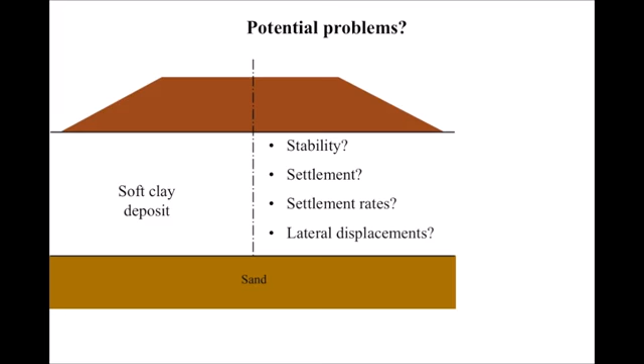As the introduction, the problems associated with embankments on soft clays are essentially stability, settlement rates, lateral displacements. For this presentation, we talk only on settlements and settlement rates, in other words, we'll talk about compressibility and consolidation.

Usually, the compressibility of clays is represented in a e-log sigma prime V diagram and characterized by the pre-consolidation pressure, which is defined by sigma prime p or sigma prime Vy, and essentially the compression index C sub C.

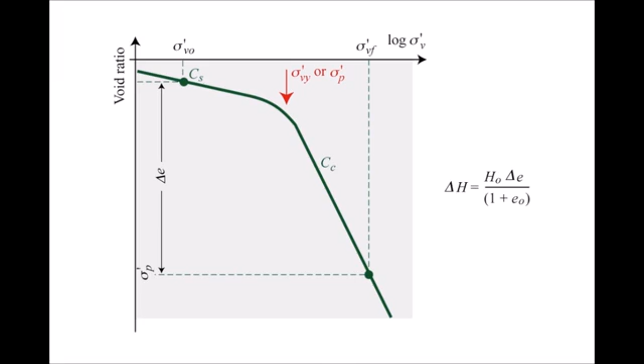With time, when we load a soil, there is some settlement, some decrease in void ratio associated first to pore pressure dissipation, and that's primary consolidation, but then settlement continues during secondary consolidation. This secondary consolidation is characterized by C alpha e, which is the slope of the curves in an e-log T diagram. The general equation for one-dimensional consolidation shows that the strain rate is directly related to the pore pressure, which means that if we have movements, settlements during secondary consolidation, there are still excess pore pressures. They are small, but still there.

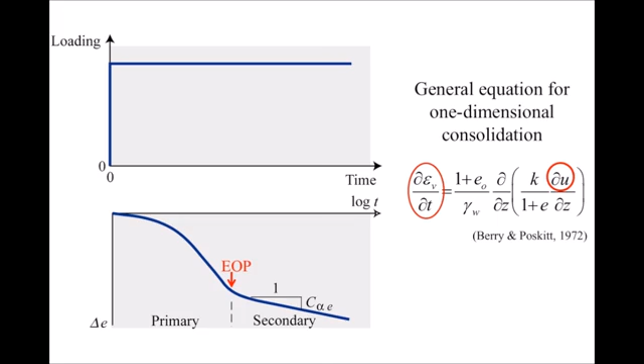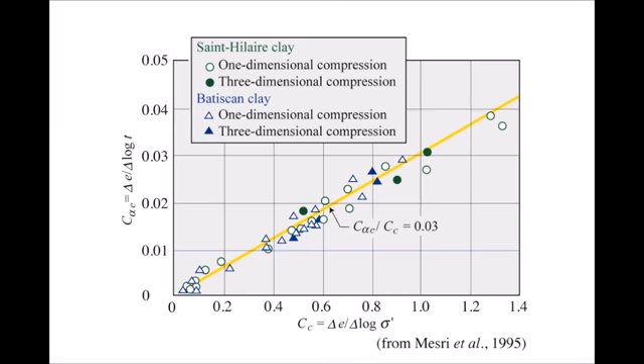In laboratory conditions, Mesri and co-workers have demonstrated that C alpha e is proportional to C sub C for a given clay. Here, the ratio is 0.03 for these two clays. They also have shown that for inorganic clays in general, this ratio is always equal to 0.04 plus or minus 0.01. For granular soils, it's smaller, but for organic soils, it is larger. So this is an interesting characteristic.

Now a few words about the CRS, constant rate of strain oedometer test, because I will refer to this test and maybe some people are not familiar with it. We have a specimen in an oedometer cell which is loaded on a press, a triaxial press, at a constant rate of strain. The objective of this test is to get a compression curve within about 2 days. The advantage of this test is that the stress-strain curve is continuous, so the pre-consolidation pressure is well defined.

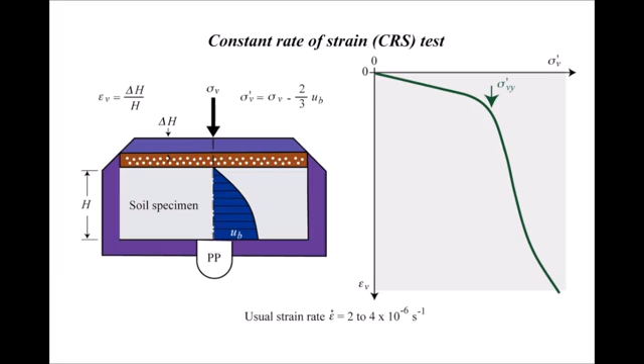In this test, we measure the pore pressure at the base of the specimen, UB, and the vertical effective stress is equal to sigma V minus 2/3 of UB. There are limitations when the pore pressure at the base is too high. What has been shown by several authors is that when we increase the rate of strain, the compression curve moves towards larger effective stresses as indicated on this figure. Here is about 10 to the minus 8 per second, and here it's 10 to the minus 5 per second.

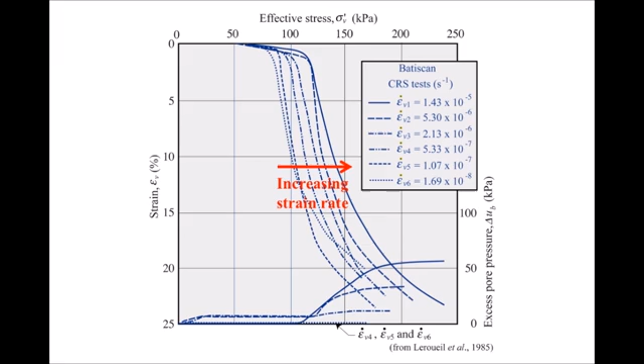From this set of curves, which we call isotaches, relevant for stage loading tests as in a conventional oedometer test, it can be shown that this set of curves can be described by two curves: one showing the log of the pre-consolidation pressure or vertical yield stress versus strain rate, and a normalized effective stress-strain curve in which the vertical effective stress is normalized with respect to the pre-consolidation pressure associated to the strain rate.

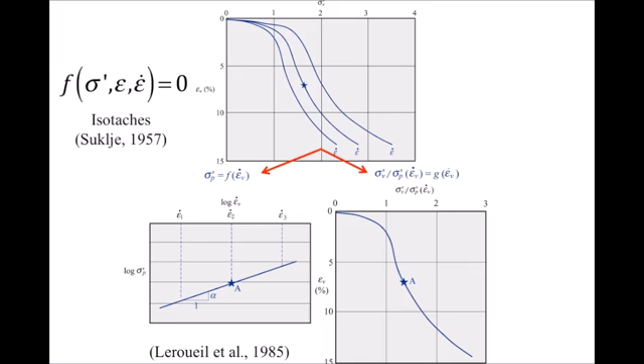The slope in the log-log diagram can be defined by alpha. We can show that alpha is equal to C alpha E over CC. So for inorganic clays, for example, C alpha over CC, or alpha, is equal to 0.04 typically. This means that the change in effective stress when we change the strain rate by one order of magnitude is typically 10%.

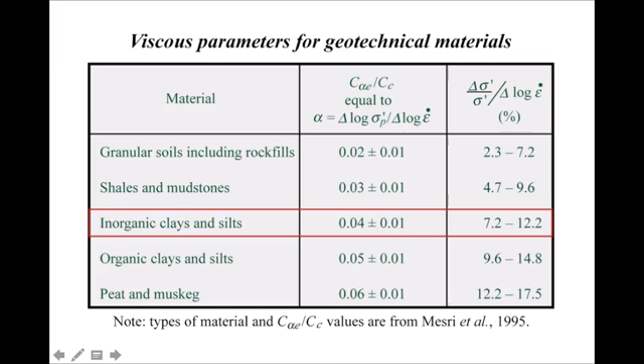Remember this number. It's smaller for granular soils and larger for organic soils.

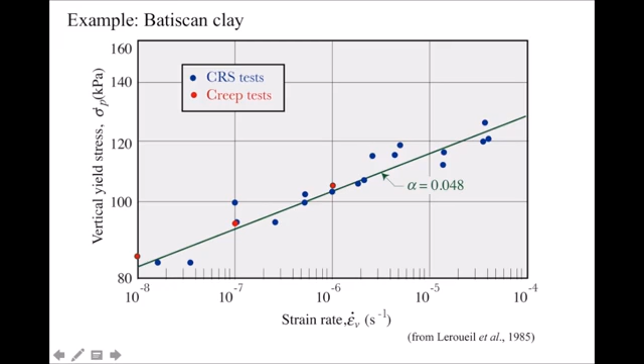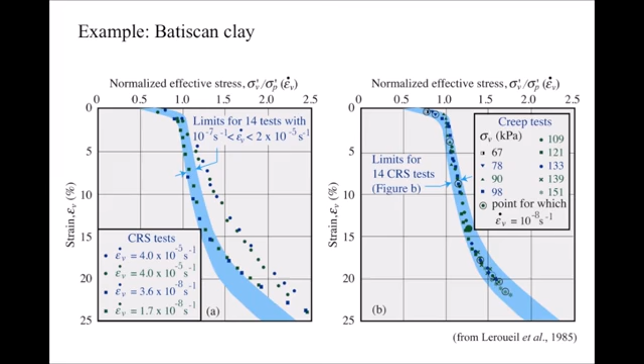This is an example on Batiscan clay, showing the vertical yield stress or pre-consolidation pressure versus strain rate in log scale, and alpha is equal to 0.048 in this case. These are, for the same clay, normalized compression curves, and you can see that all the data, except these two data points which were obtained at too large strain rates and gave too large pore pressures, are in a small range considering that we are working with a natural clay.

This is another example, Berthierville clay, and the curve in the middle here is the relationship between the vertical yield stress and the strain rate at 20 degrees, and here you have the normalized stress-strain curve.

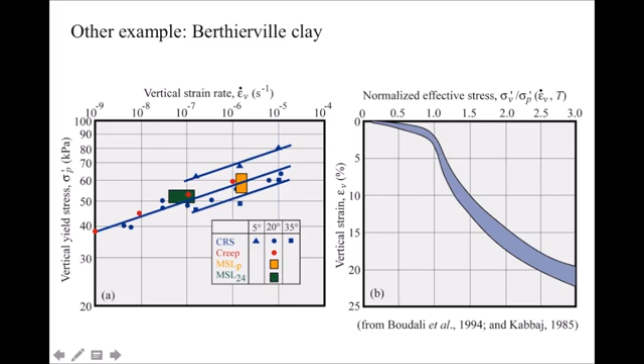Watabe et al. have shown that the relationship is not perfectly linear in log-log, but is curved as shown here. In particular, there would be an asymptote at a pre-consolidation pressure equal to 70% of the pre-consolidation pressure at a strain rate of 10 to the minus 7 per second. 10 to the minus 7 is typically the strain rate obtained after 24 hours.

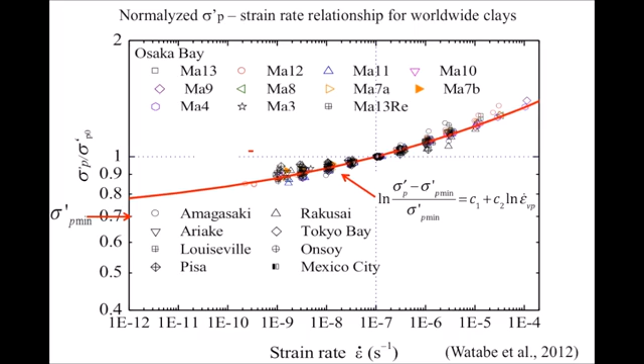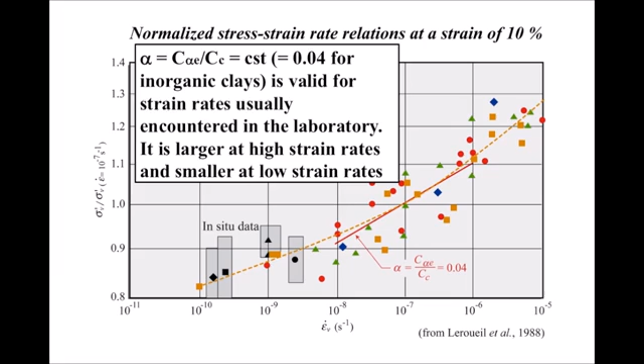So it will be a curve and not linear. We observed this earlier, and you can see on this data that alpha is equal to 0.04 between typically 10 to the minus 8 and 10 to the minus 6, which are strain rates usually obtained in laboratory tests. But at larger strain rates, the slope is larger, and it is smaller at small strain rates. This is consistent with what is shown here.

These test results were obtained by loading specimens in the normally consolidated range and then unloading just a bit to a given OCR. When the OCR is relatively small, such as 1.5 here, after unloading the soil swells a bit and then starts settling again in secondary consolidation. However, when the OCR is high, for example 8 here, there is swelling due to pore pressure dissipation, and then the soil continues to swell in a kind of secondary swelling.

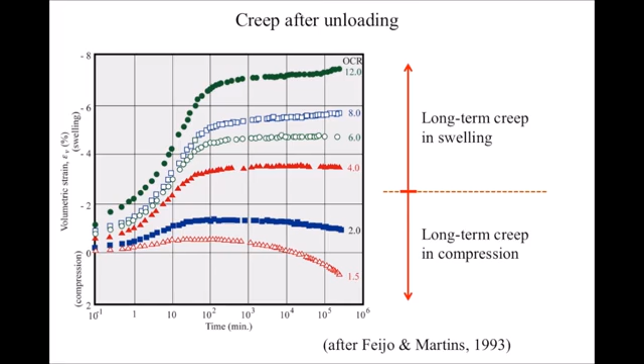So the strain rate model I was talking about before can be generalized in this form, where we have secondary consolidation, but below an indifferent equilibrium somewhere here, we have secondary swelling. So it's a kind of generalization of the stress-strain rate model.

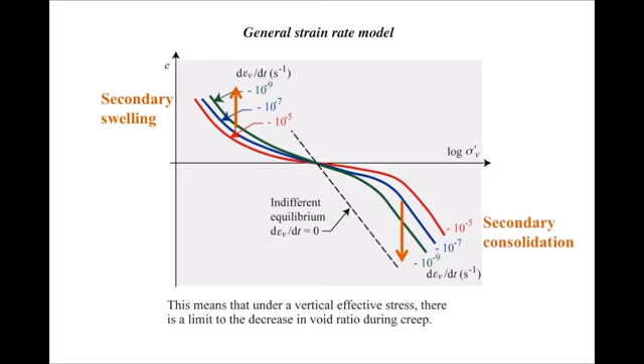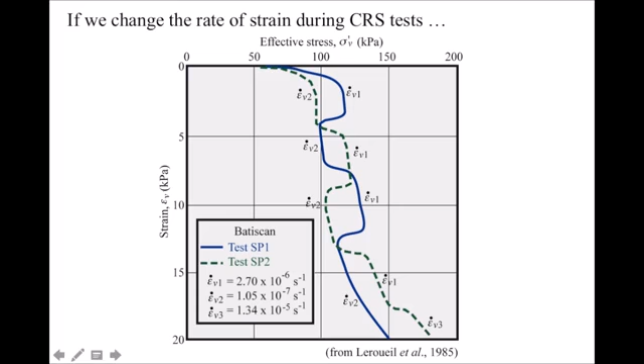Now, if we come back to the CRS test, I told you that typically it's completed in about 2 days, and the strain rates usually used are between 3 and 5 times 10 to the minus 6 per second. I told you also that after 24 hours, the strain rate is typically 10 to the minus 7 or slightly less, which explains that the compression curves obtained in CRS tests and in conventional 24-hour tests are different, with the CRS test giving a compression curve at higher effective stresses than the 24-hour test due to strain rate.

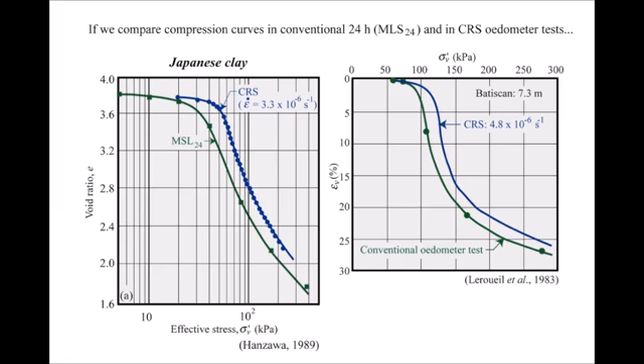This has been observed on many clays, here Japanese and Quebec clays, and it can be shown that the strain rate is in this order, slightly less than 10 to the minus 7, as I was saying before.

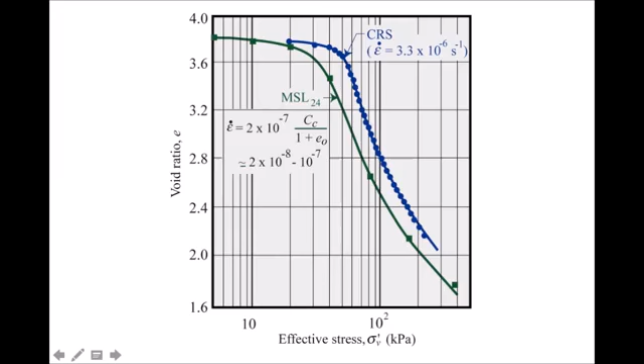Because of this, it appears that the pre-consolidation pressure obtained in CRS tests is typically 25% larger than that obtained in conventional 24-hour tests, which means that if you change your test to a CRS, be aware that your calculated settlements will be much smaller than with the 24-hour oedometer test. This has been observed in Quebec, Japan, Finland, Italy, UK, Sweden, Hong Kong, and Singapore, so it's quite general.

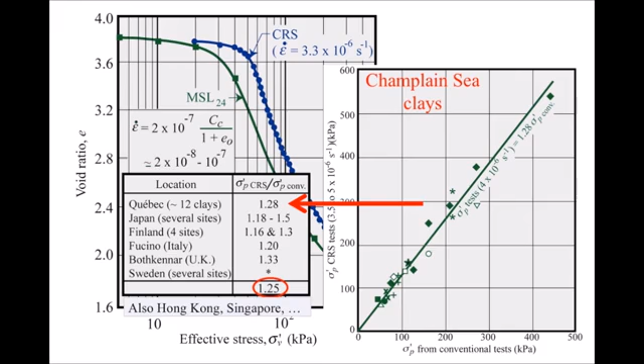Another aspect relates to what happens within a specimen. Mesri and co-workers made special tests with specimens, with four subspecimens in series, subspecimen 4 being close to the impervious boundary and specimen 1 being close to the drainage boundary. They loaded such specimens.

They loaded it to the same stress increase, and the results here are typical of what they observed. Specimen 1 goes to relatively high stresses, while specimen 4 goes to much smaller stresses, and subspecimens 2 and 3 are somewhere in between.

This can be explained as follows. Close to the drainage boundary, the strain rate is initially high, so the soil goes to the high strain rate curve, while far from the drainage boundary, the strain rate initially is relatively much smaller, so the effective stress goes to lower effective stresses. When consolidation progresses, the strain rates become more homogeneous within the specimen, and all the curves converge. So the subspecimens in one specimen do not follow the same stress-strain curve because of strain rate.

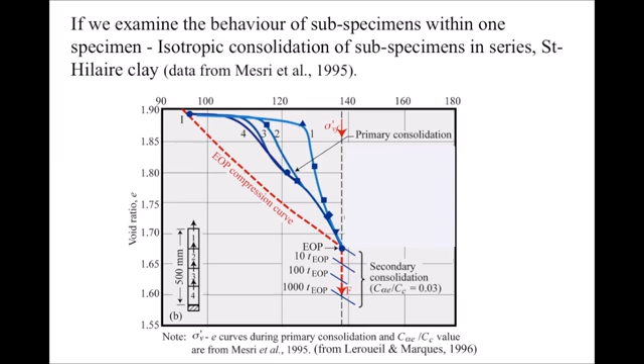From these results, it's possible to define a set of isotache, constant rate of strain curves, and subspecimen 1 goes to a high strain rate, 10 to the minus 5, while subspecimen 4 goes to the curve at about 10 to the minus 6. So this is consistent with the strain rate model.

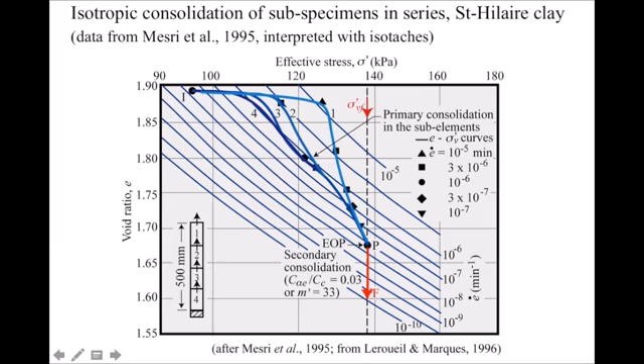Another aspect which has been discussed a lot is what happens if we have clay layers of different thicknesses. This problem has been raised by Ladd et al. in 1977, and there are two extreme hypotheses.

Hypothesis A considers that there is no viscosity during primary consolidation, and that whatever the thickness of the soil layer and whatever the strain rates, the stress-strain curve followed is the same during primary consolidation.

On the other hand, there is hypothesis B, which considers that there is viscosity during primary consolidation as during secondary consolidation, and that consequently the compression curve followed in a thick specimen will be below the one obtained on a small specimen. So here would be the small specimen thickness, and here the thick specimen thickness.

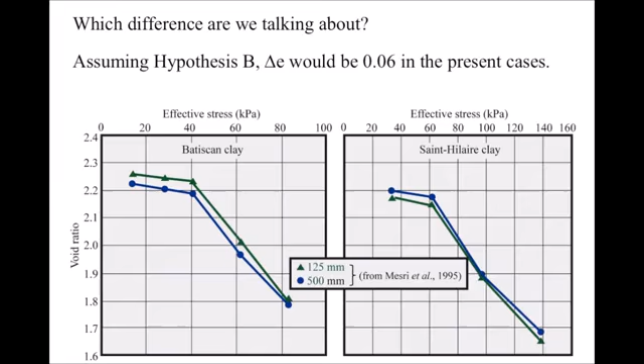But there is something more important: how the end of primary consolidation is defined. Degago et al. in 2009 examined this data and considered that we could define the end of primary consolidation at a given degree of consolidation.

So, for example, 96% in figure A and 93% in figure B. They looked at the results at the same degree of consolidation, and came with the red curves for the 125 millimeters rather than the green here—the red curve here rather than the green.

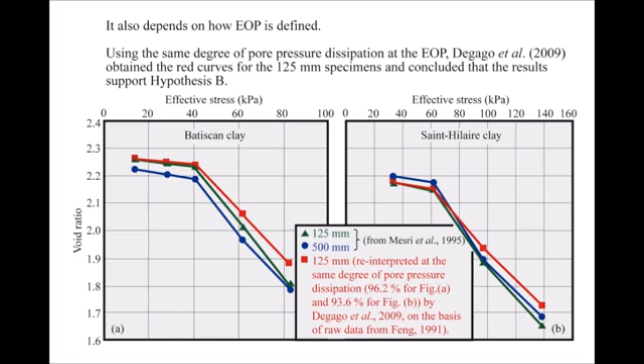At that time, they found that there is a difference between the two specimens, and that this difference is not far from 0.06. They concluded that hypothesis B is the correct one, consistent with the strain rate model previously described. So clay behavior is controlled by an effective stress, strain, strain rate relationship, and this model can be extended, but also can present limitations.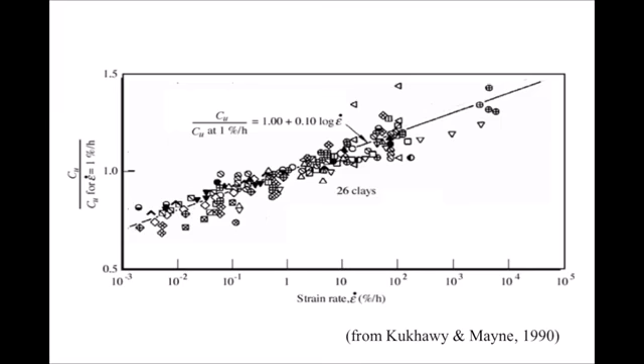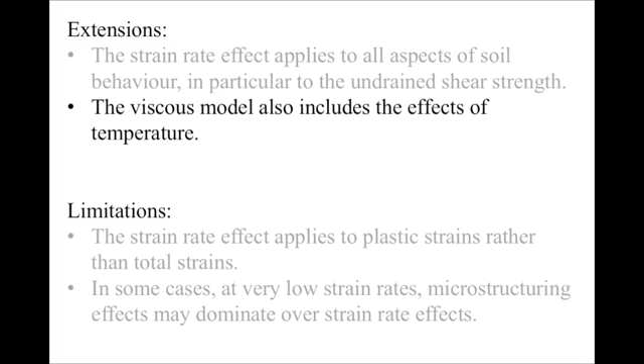Another extension is that the viscous model, the strain rate model, can also include the effects of temperature. This has been shown by several people, in particular by Eriksson, who performed CRS tests on Swedish clay at different temperatures. The results are shown here: the smaller the temperature, the larger the vertical effective stress. The pre-consolidation pressure, or vertical yield stress, is plotted as a function of temperature, and there is a decrease with increasing temperature.

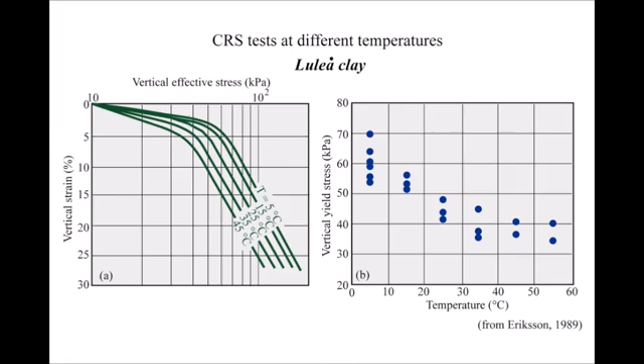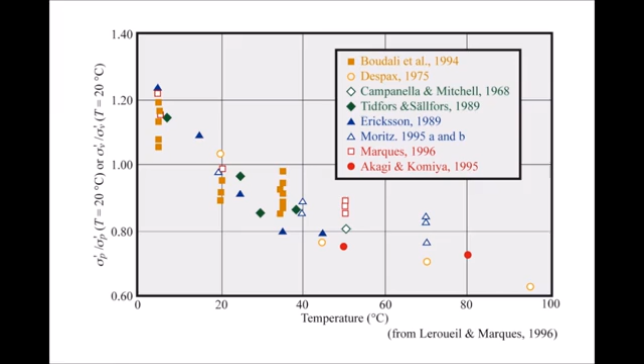It has been shown that the relationship obtained on Luleå clay is about the same as the one obtained on a variety of clays, as you can see here. So the pre-consolidation pressure, or vertical yield stress, which was a function of strain rate, is also a function of temperature. This is shown here for the Berthierville clay, with the line in the middle at 20 degrees, the upper one at 5 degrees, and the lower one at 35 degrees.

But when the vertical effective stress is normalized with respect to the pre-consolidation pressure associated with the temperature and strain rate, all the data come into a very narrow band. So it can be said that the strain rate model can be extended to temperature, and we have similar numbers for different clays in terms of effects of temperature and strain rate. The alpha is 0.04 for inorganic clays, and there is no doubt that there is something fundamental behind this.

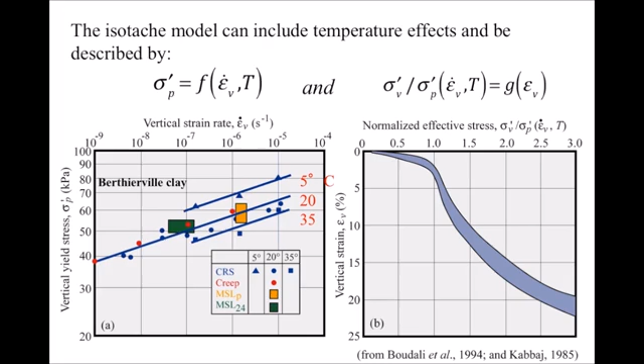Limitations now: the strain rate effects apply to plastic strains rather than total strains. Consequences are relatively small in most cases, but fundamentally it's important to indicate that point. When we have a clay during secondary consolidation, with a decreasing void ratio, if we stop the strain, the strain rate is zero, so it's constant, and the effective stress should be constant. It's not the case.

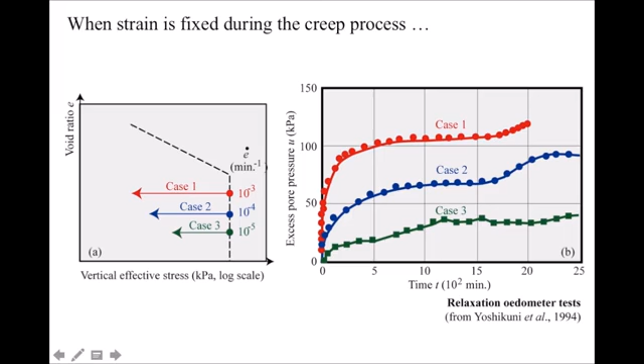During this test, with time, the pore pressure increases, and so the effective stress is decreasing. The explanation is given here: if we have soil at a point such as A, the plastic strain has a tendency to creep, to increase and go here.

But as the strain or void ratio is constant, the soil has to compensate with an equal value of elastic strain, shown here, and to have this, we have to decrease the effective stress. So in what we call a relaxation test, the soil has to increase its pore pressure. So it's not a limitation, but a specification of the soil behavior.

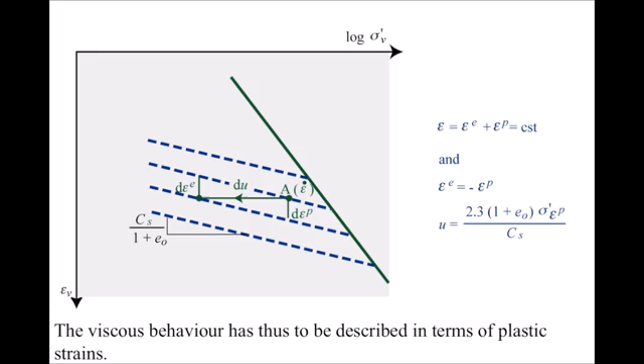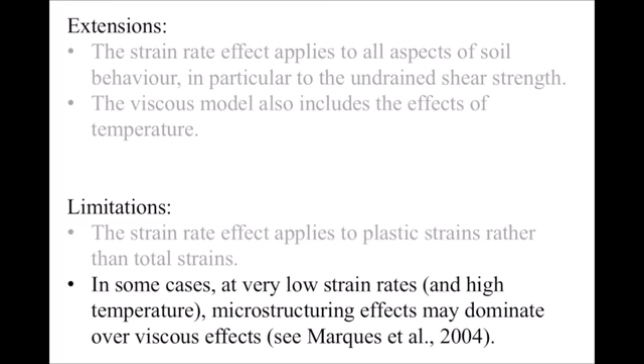Finally, in some cases, at very low strain rates or high temperatures, microstructuring, or bonding of the soil, may dominate over viscous effects, and that could be a limitation. So, in conclusion, from laboratory observations, clay behavior is controlled by strain rate and temperature. Now, what happens in situ?

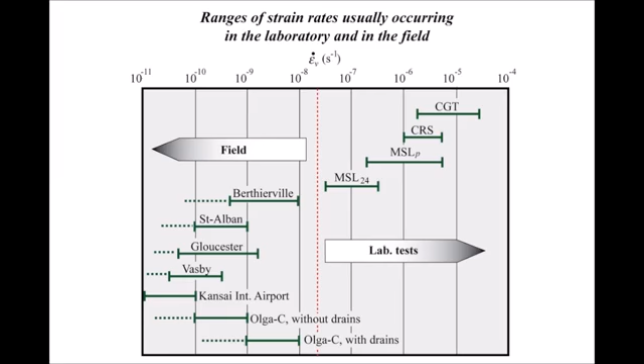Consequently, in our strain rate model, the compression curve followed in situ should be below the compression curve followed in the lab. Smaller strain rate, smaller effective stress. So that's what we have examined.

I remember this figure. Hypothesis A indicates that the compression curve in situ and in the lab would be the same, while hypothesis B indicates that the laboratory curve would be here, while the in situ curve would be below, as shown here. Also, the strain in situ would be smaller with hypothesis A than with hypothesis B.

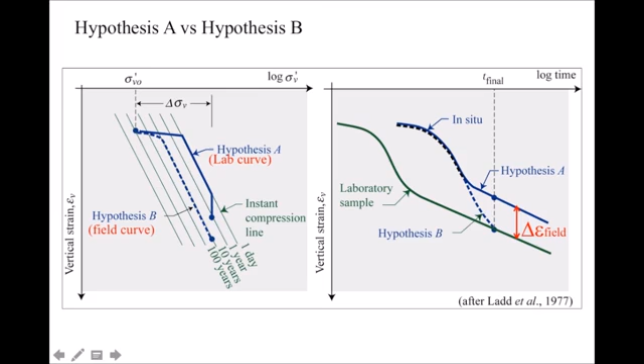So we have examined this aspect by examining the effective stress strain curves in situ, under embankment. If we have deep settlement gauges, we can define the evolution of strain and strain rate with time. But also if we have the pore pressure, we can define the vertical effective stress and then get the field compression curve, which is the truth. Nature is saying that's the compression curve.

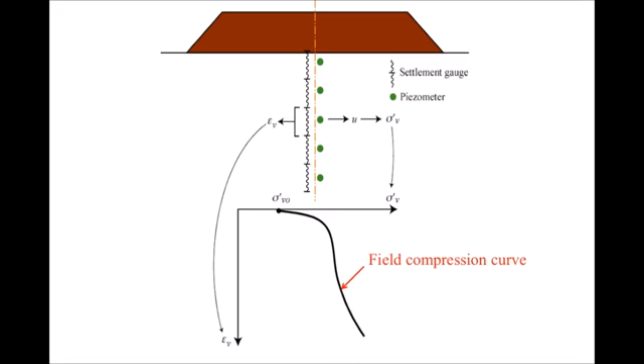This has been done and compared under four test embankments: Berthierville, Gloucester, Saint-Alban, and Vasby in Sweden. In green we have the compression curve obtained at the end of primary consolidation on high-quality samples, and in red, the in situ curve. We can see that in all cases, the in situ compression curve is below the compression curve obtained at the end of primary on high-quality samples in the lab, indicating that at least hypothesis A is wrong.

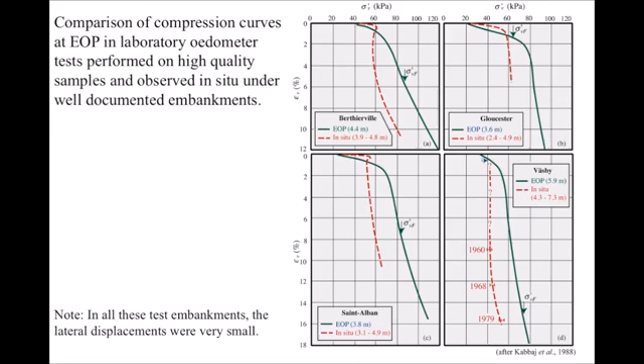Now, the effective stresses have been plotted in a normalized form here, and we have the rectangles here for in situ data, and the other points are laboratory data, which indicates that the in situ behavior is in continuity with, or consistent with, the laboratory data, indicating that hypothesis B is the correct one.

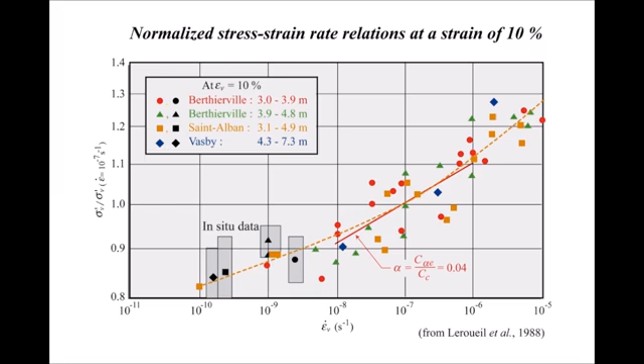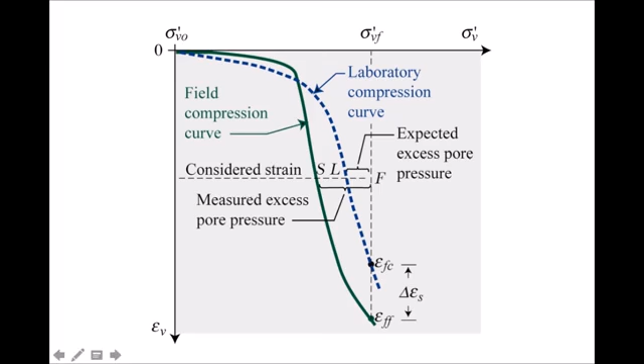Now, there are some cases where the data were not so well defined, but we can say that if we have the laboratory curve here in blue and the field curve in green, and if we estimate at a considered strain the pore pressure from the laboratory curve, the excess pore pressure at a given time is Lf. But in situ, it should be Fs, with Fs larger than Lf. That's in the logic of the strain rate model.

This can be shown with the case of the Changi Airport in Singapore. Here we have marine clays over about 40 meters, and it's a site which has been reclaimed - the airport is built over the sea on these clays.

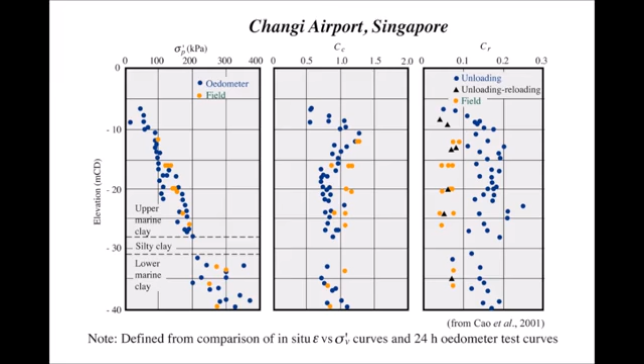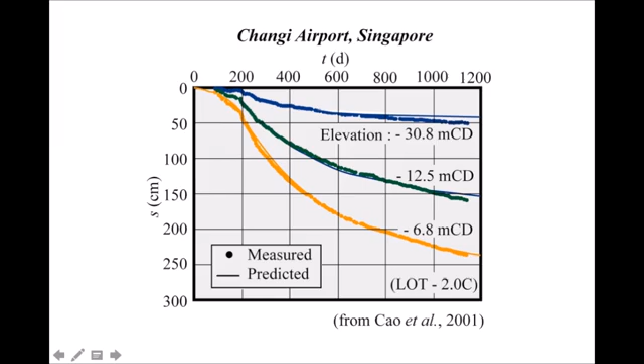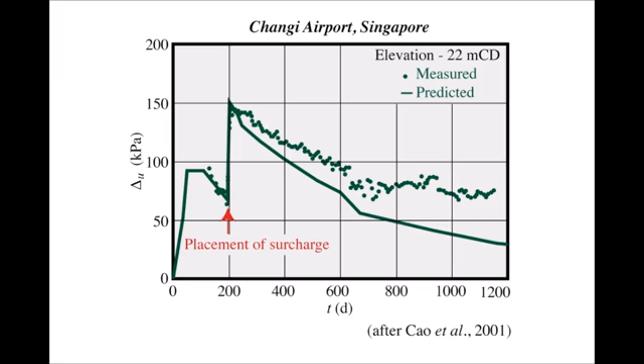By considering the 24-hour oedometer curves and by adjusting the permeability, they achieved excellent correlation between predicted settlements and measured settlements at different depths. But at the same time, they were not able to have such good agreement in terms of pore pressures, and in all cases, the measured pore pressure was larger than the predicted one - which is again in the logic of the strain rate model, with the in situ compression curve below the laboratory one. This has been observed in other cases in UK, in the States, in France, and in Sweden.

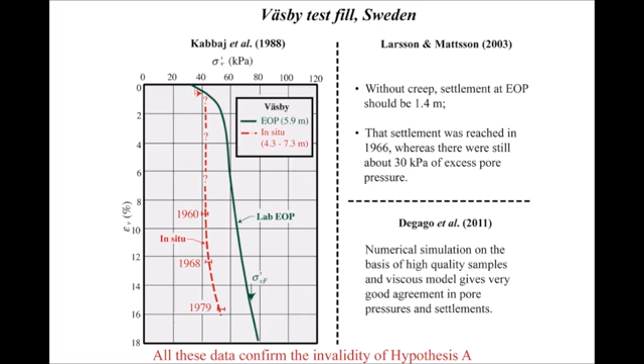More recently, a numerical simulation based on high-quality samples and a viscous model gives very good agreement in pore pressures and settlement, according to Degago et al. So all these data confirm the invalidity of hypothesis A and, in fact, the validity of hypothesis B.

However, Mesri and Choi in 1985 used the Väsby data to try to prove that hypothesis A was correct. For that, they used compression curves obtained on 50 millimeter specimens taken with a 50 millimeter Swedish standard piston sampler, taken in the 1960s. Here you have the field curve, and in orange the compression curve used by Mesri and Choi. Indeed, the two curves are not very different.

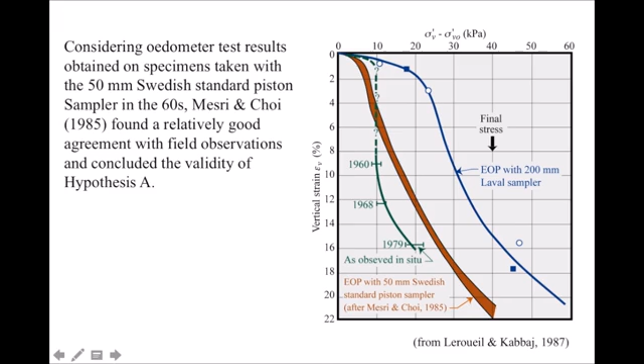Which explains why they came to the conclusion that hypothesis A was correct. However, you can see here that the curve obtained on the 200 millimeter diameter Laval sampler is very different, obtained at much higher stresses. And the explanation is given here.

Here we have a compression test shown with a dashed line at the end of primary, and the full line after 24 hours. Compression curves obtained with the 200 millimeter Laval sampler are in blue, and the 50 millimeter Swedish sampler in green. We can see that the Swedish sampler is disturbing the clay. The pre-consolidation pressure is significantly smaller and the curve is much more rounded. So it is believed that Mesri and Choi got a good agreement because the sampling disturbance was compensating for the viscous effects.

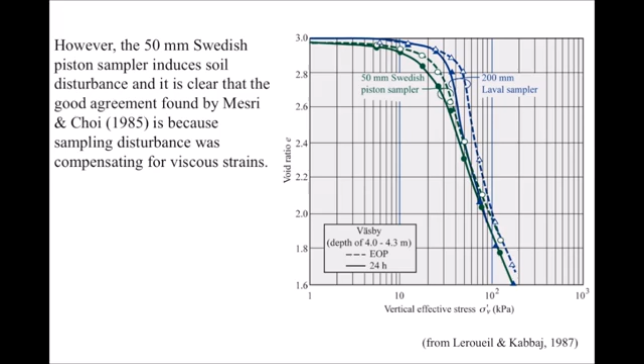Another case is the Kansai International Airport in Japan. It's an airport built offshore Osaka, about 4 kilometers from the shore. There was 18 meters of water, 18 meters of very soft alluvial clay, and several hundred meters of Pleistocene clays.

These Pleistocene clays are alternating with sand layers which are more or less draining. So that's the situation, which is quite complex due to these sand layers. For building the island, the alluvial clay was treated with vertical drains, and the settlement of the alluvial clays was completed in about 6 months.

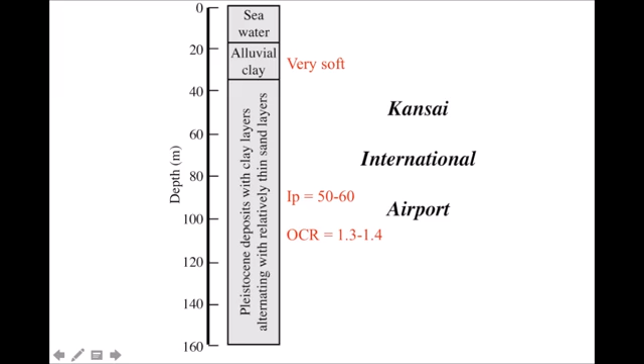So the long-term settlements are coming from the Pleistocene clays. Professor Akai calculated settlements on the basis of a 24-hour oedometer test, neglecting viscosity or rate effects. He came up with a final settlement of 5.9 meters.

And here you have the field observations. In 1994, when the airport was opened, the calculated settlement was equal to the measured one. So everything was apparently going well. But then you can see that the field settlements become much more important than the predicted one.

The 5.89 meters was reached in 1998, and in 2002 the settlement was 1 meter larger.

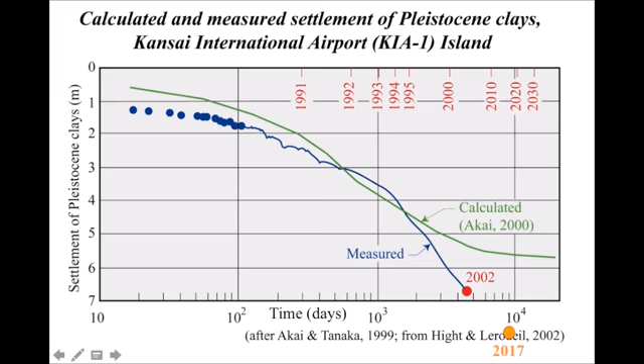And in fact, when we look at the pore pressures under the embankment, under the island, we can see that in this period the excess pore pressures are still larger than 200 kPa. That's a lot of pore pressure to dissipate, which means there is still a lot of settlement to come.

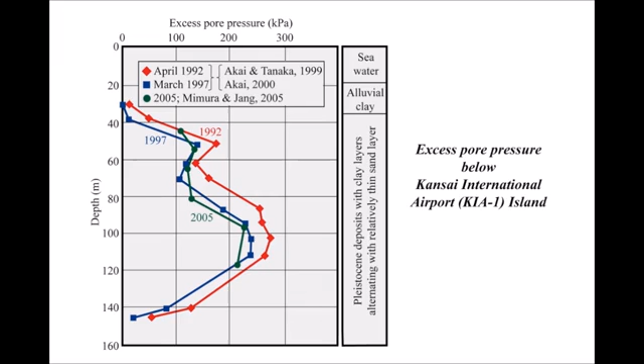So we think that this is consistent with the rate effect observed on Osaka Bay clay, with the result shown here. And we said, with David Hight, that this is another proof that hypothesis A is wrong.

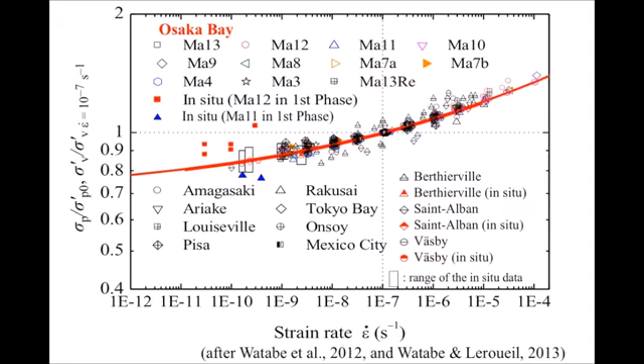We must say, however, that Mesri and Funk last year published a paper analyzing the Kansai airport case, and consider that the end of primary settlement would be about 9 meters rather than the 5.9 meters calculated by Akai, and that hypothesis A could be correct. I must say that I doubt these results. There is no doubt in my mind that there is creep during primary consolidation and that hypothesis A is incorrect.

Now, what do we do practically to calculate settlements? My conclusions, which I reached about 10 years ago, are the following: in high compressibility clays, or in cases of well-controlled embankments, or in cases where excessive settlements may have important consequences, viscous effects must be considered during primary consolidation.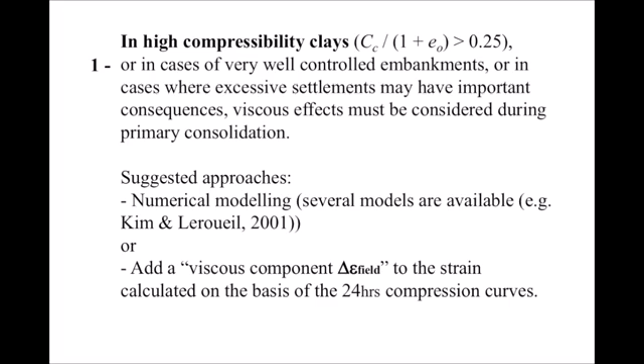There are several approaches which can be followed. One is numerical modeling, and there are several models on the market, or adding a viscous component called delta epsilon field to the strain calculated on the basis of the 24-hour compression curves. In fact, there are three main questions. The first one is: what is the in situ sigma prime p, or sigma prime v y?

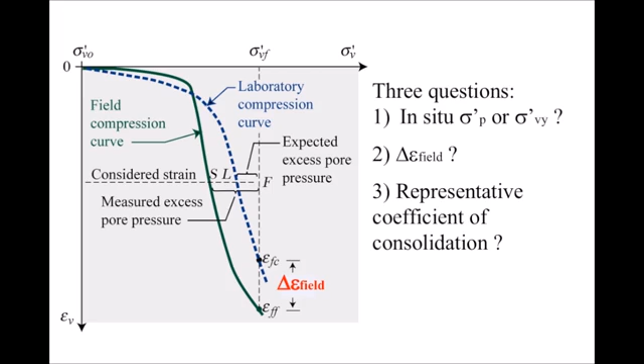And what is delta epsilon field that we would have to add to the strain calculated on the basis of the 24 hours compression curves? And the third question is, what is the representative coefficient of consolidation?

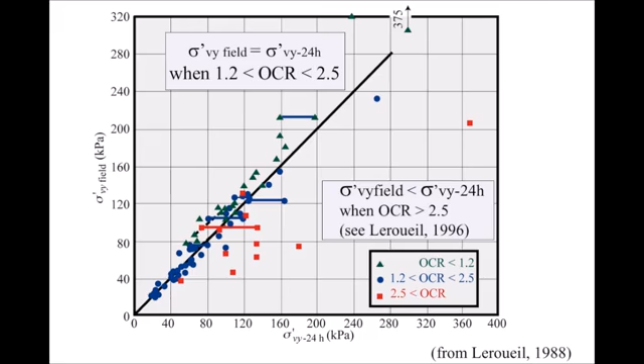About the first question, in fact, we compared sigma prime Vy in the field with sigma prime Vy obtained after 24 hours, and we obtained a good agreement for OCRs lower than 2.5. For OCRs larger than 2.5, in fact, the field data are smaller, and this has been explained by the shape of the limit state curves of natural clays.

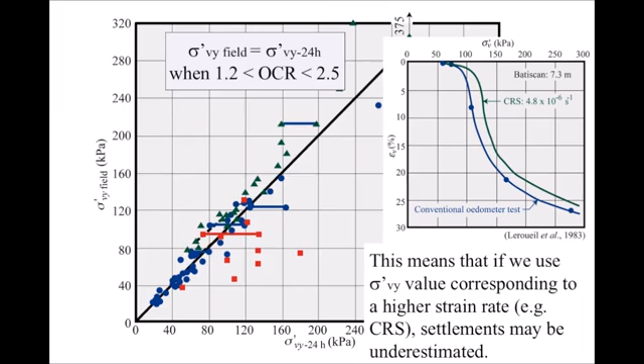That means also that if you change your 24 hours pre-consolidation pressure by pre-consolidation pressure obtained at larger strain rates, as in CRS test, at that time you could overestimate the pre-consolidation pressure and the settlement. So be careful.

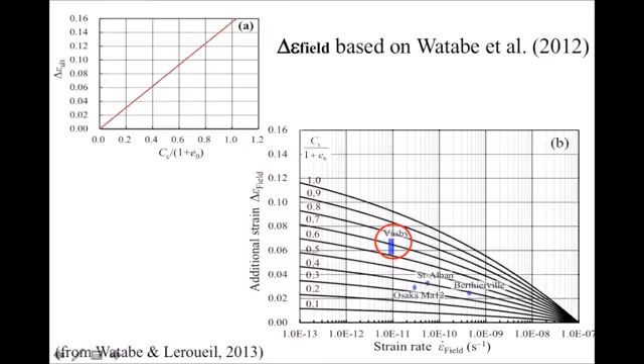Now for normal practice, everyday practice, low compressibility clays, because there are several factors which are, say, fighting against the viscous effects. I mentioned the effect of strain rate first in low compressibility clays is relatively small, but in most cases,

in normal practice, we have sampling disturbance. Settlements imply a decrease of the applied total stress with time that is often neglected. Quite often, the water table rises in the embankment, and the 24 hours oedometer test already includes some secondary compression. All these factors are to some extent compensating for the viscous effects.

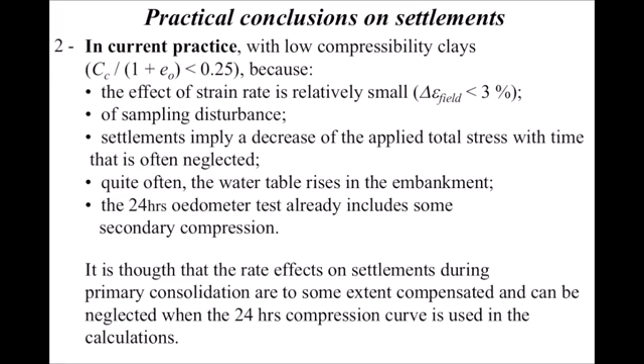So my conclusion is that the rate effects on settlements during primary consolidation are to some extent so compensated and can be neglected when 24 hours compression curve is used in the calculation. So, in conclusion, from now on, do as you have done before, except for special cases.

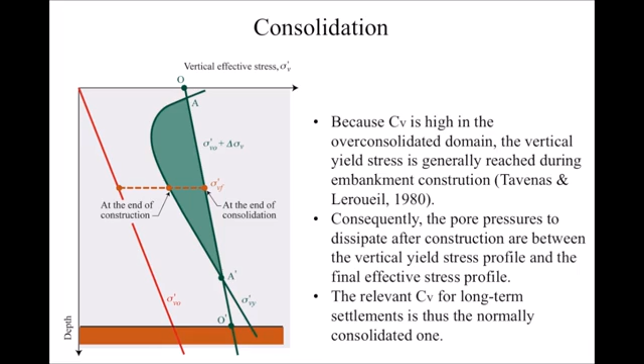Consolidation. In fact, because CV is high in the over-consolidated domain, the vertical yield stress is generally reached during construction. That means that at the end of construction, generally, the vertical effective stress is on the pre-consolidation pressure profile, which means that on the long term, the pore pressure to dissipate is the one which is shown in green here, in the normally consolidated range, which means that the relevant coefficient of consolidation is the one in the normally consolidated range.

From our experience in Eastern Canada, with several sites and several embankments, what happens is that for under embankments, the normally consolidated coefficient of consolidation is typically around 10⁻⁷ square meters per second. In the over-consolidated range, it's typically, I would say, 50 times larger, because in the over-consolidated range, the natural clays are quite stiff.

Now, if we consider the CV values obtained in oedometer tests and analyzed with the log-T method, the CV underestimates the real value in situ, and typically for our clays by a factor of 10, which is significant.

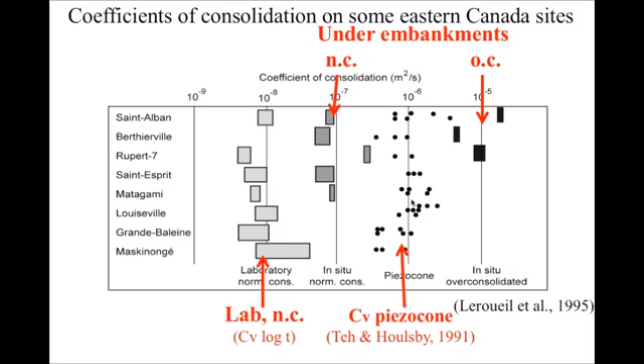Now, main conclusions. In fact, the compressibility of clay soils is controlled by strain rate and also temperature. Isotach hypothesis B provides a consistent constitutive model which applies during both primary and secondary consolidations, and all well-documented cases support its validity.

Hypothesis A is incorrect and requires two constitutive equations, one during primary consolidation and another one during secondary consolidation, which is certainly not logical. As demonstrated with the VSB case, it may provide reasonable result when samples are sufficiently disturbed.